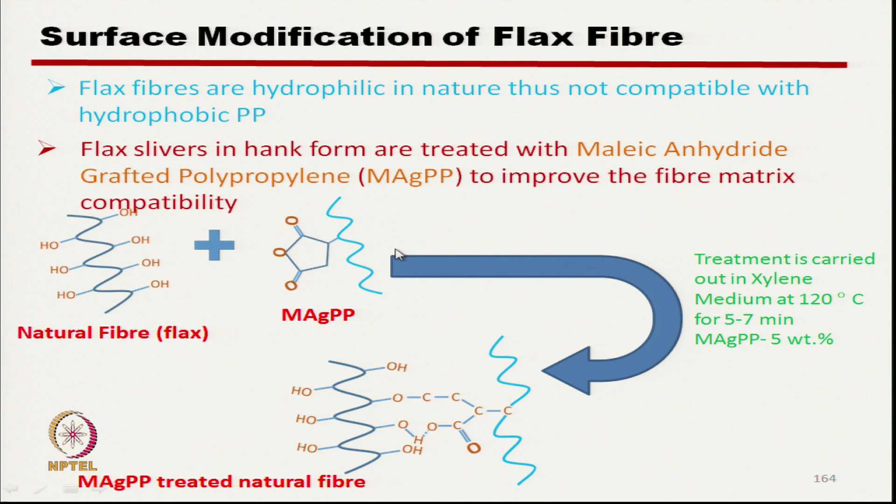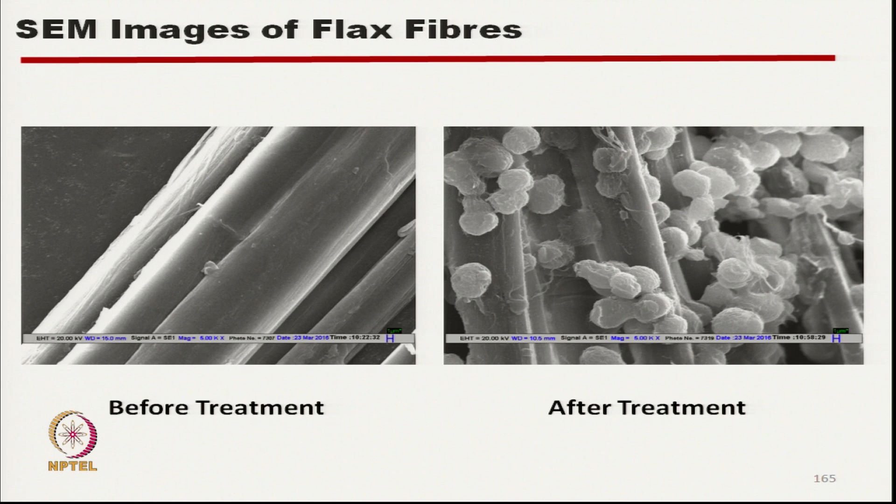With treatment we have seen significant improvement in properties. Here we have used 50-50 polypropylene and flax ratio, and we have fabricated the composite using film stacking technique, and this 50-50 ratio is at the composite stage.

If we see in the thermally bonded roving stage, what we have used is 60-40, 60% flax and 40% polypropylene, and once we add extra polypropylene film in between the series of rovings, the polypropylene percent has increased, so ultimately it has become 50-50.

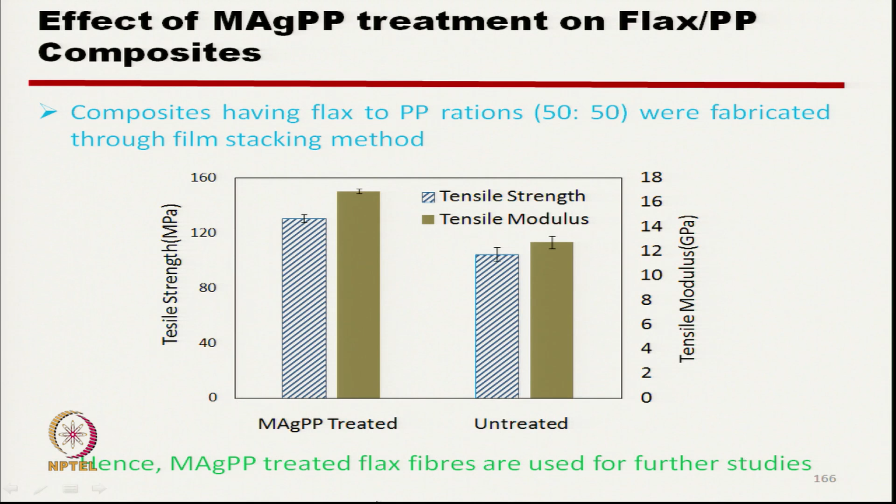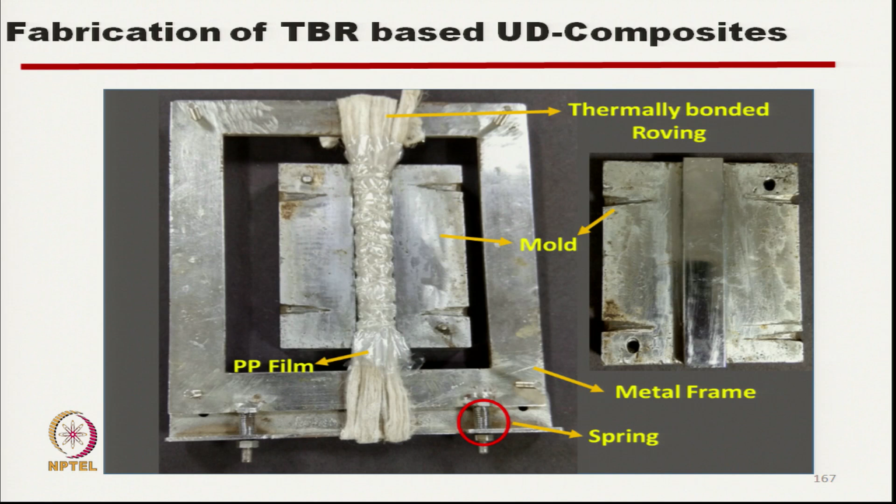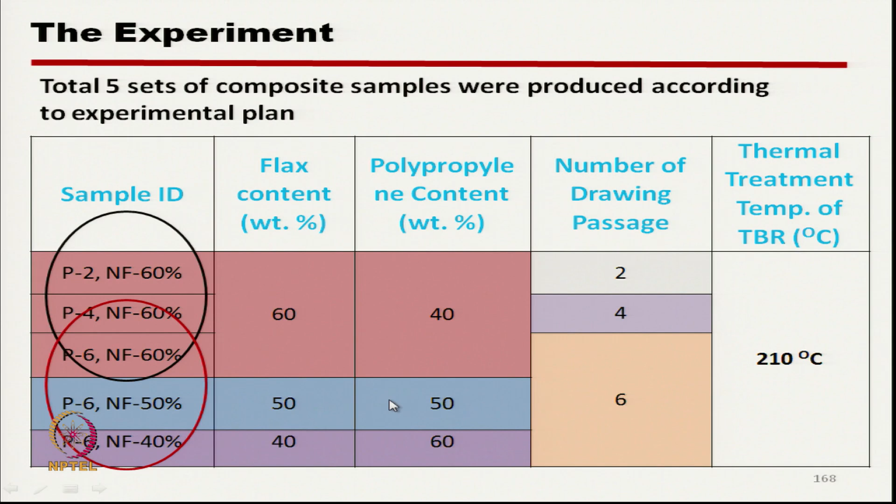So this is polypropylene content and flax content, and at the total composite stage it will ultimately be 50-50. The composite we prepared is up to 50-50, but these are at the TBR stage - thermally bonded roving stage - number of passages, and the treatment temperature for all the composites we have used here is 210. So thermally bonded roving produced at 210 was used in this composite manufacturing process.

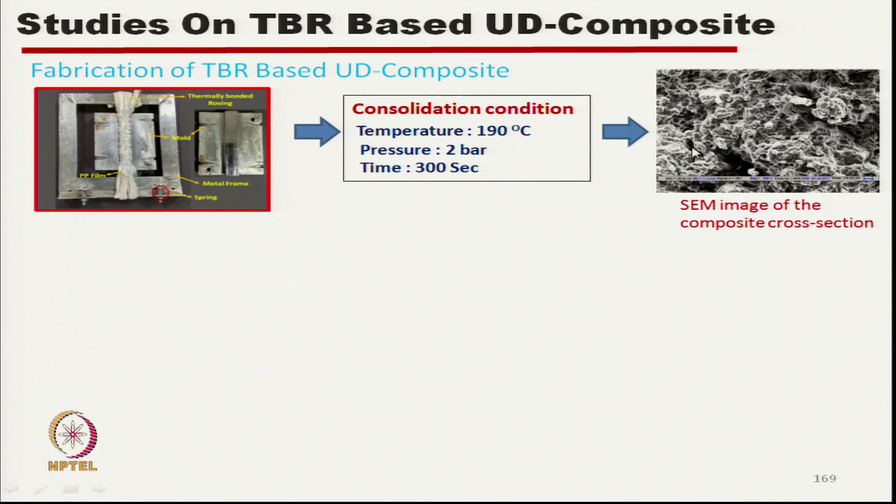After consolidation, if we see this scanning electron microscope image, it is clear that the polypropylene and flax are mixed almost uniformly.

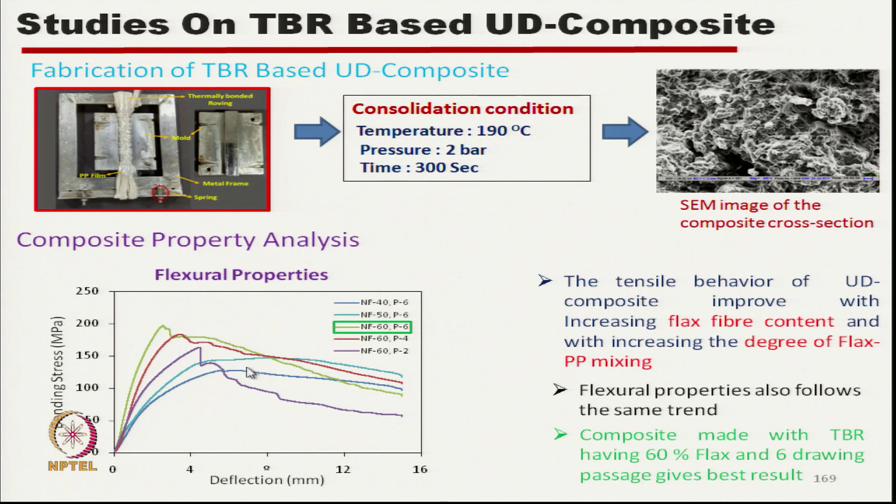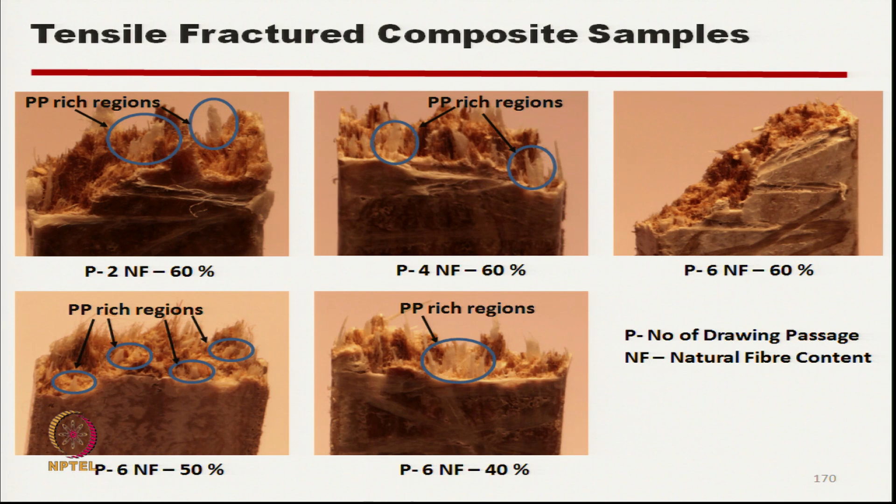Even at 4 drawing passages we can still observe the polypropylene rich zones, but when we increase the passages to 6, these are uniform. So, if we have to produce the thermally bonded roving using natural fiber and thermoplastic matrix fiber, we have to use more drawing passages for better blending.

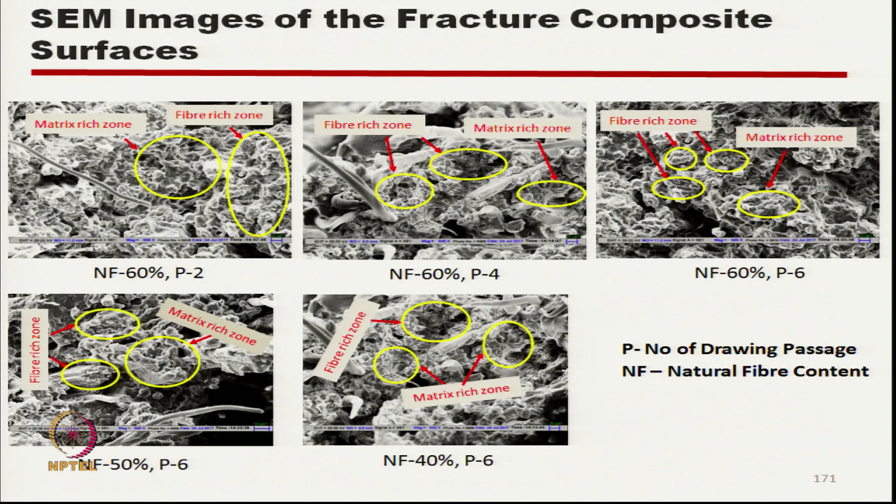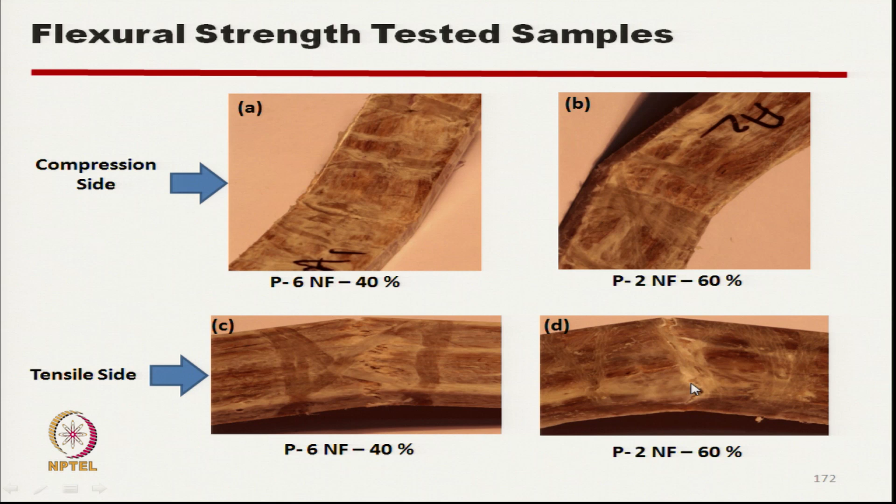In compression side with number of passages of say 6, as the matrix and reinforcing fibers are evenly distributed, there is no delamination or less delamination, but at lower level of mixing we can see they are getting easily delaminated. This trend we have already seen.

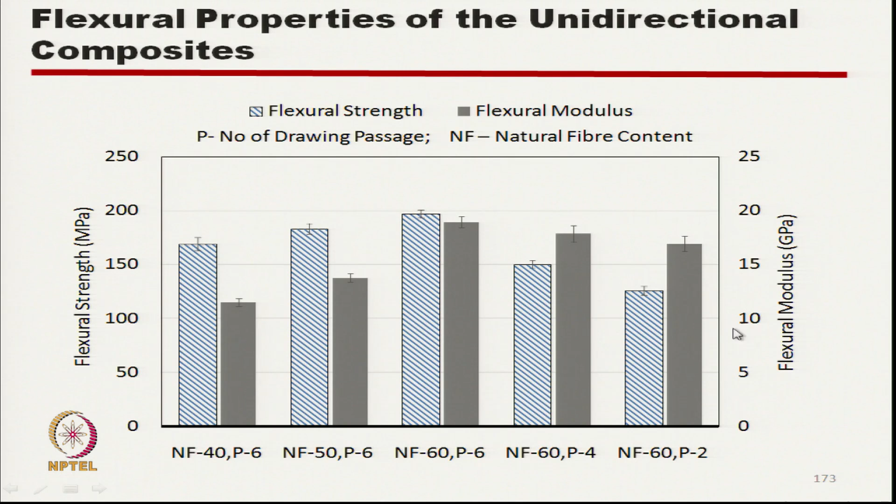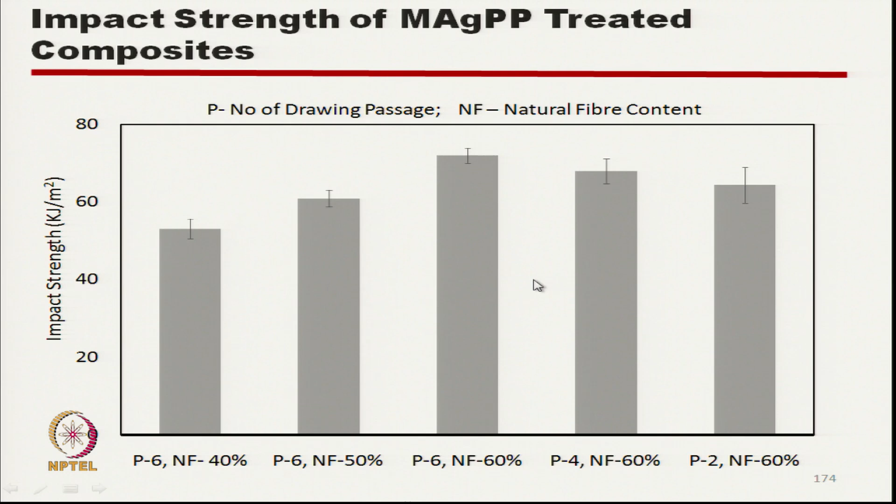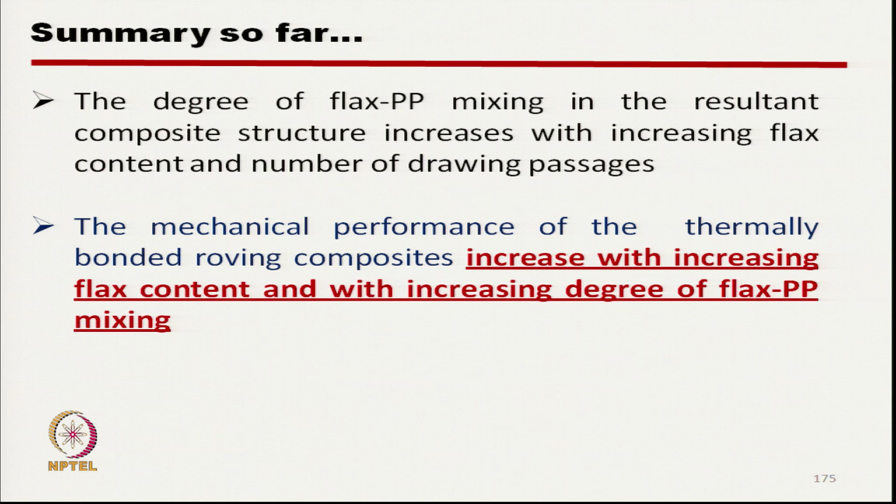Next study was the woven fabric we have developed, the plain woven fabric, and after making the woven fabric we have developed composites by film stacking technique. The composite made by this technique was compared with the unidirectional composite already discussed, and also, for reference, with the glass fiber reinforced composite.

What we have done? We have developed unidirectional fabric and plain fabric. The difference here is that in unidirectional fabric we have used in the warp the polypropylene filament, with very low ends per inch. We can use this thermally bonded roving for warp also.

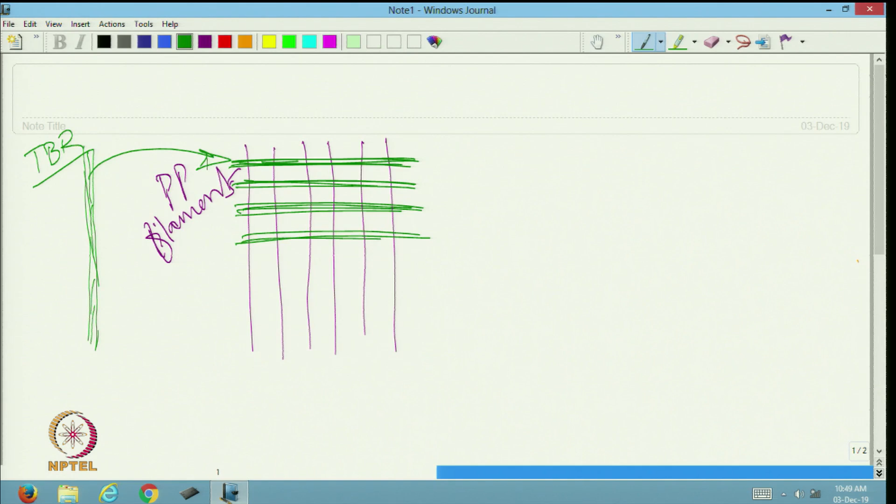Effectively, so this is a fabric, this is the preform, and the warp is PP. So once we produce composite out of this fabric by film stacking technique, this polypropylene will be mixed with the matrix component. Effectively, in this weft direction, the TBR will have the reinforcing fiber aligned to only this direction - that is why we call it unidirectional composite.

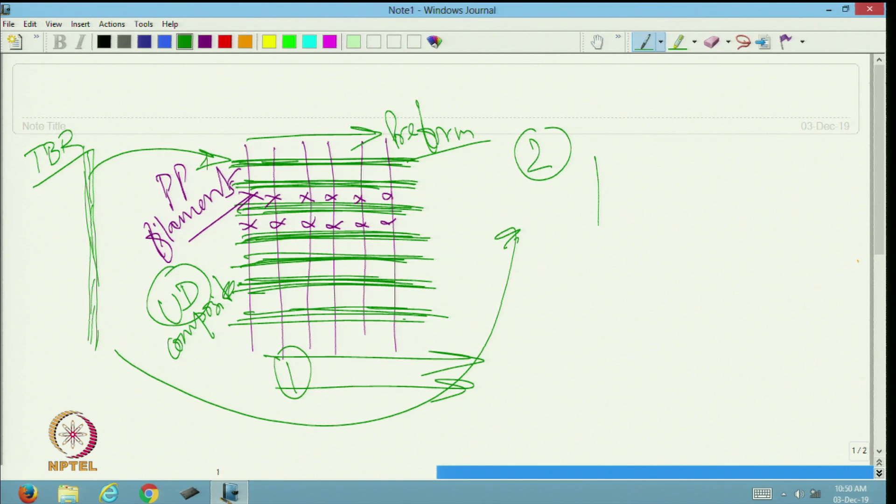This TBR approach is approach 1. In approach 2, what we have done is this TBR was used both for warp and weft. Although in TBR we know thermally bonded roving, here both PP plus flax are present. Now this woven fabric, plain woven fabric, was used to manufacture the composite again by film stacking technique.

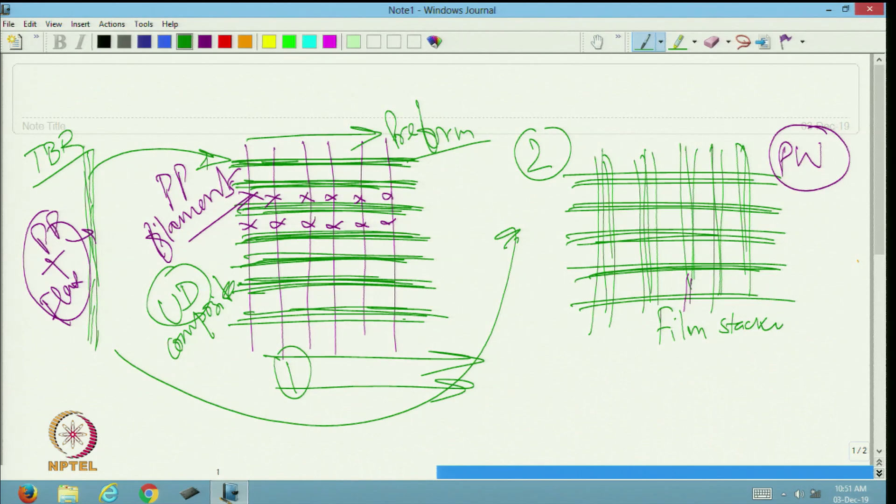So these two different structures were developed - this is unidirectional fabric and this is plain woven fabric. TBR based woven fabrics are consolidated in a compression molding machine, and composite laminates having flax and PP ratio of 50-50 were produced using the PP film. So the final composite had polypropylene and flax proportion of 1:1.

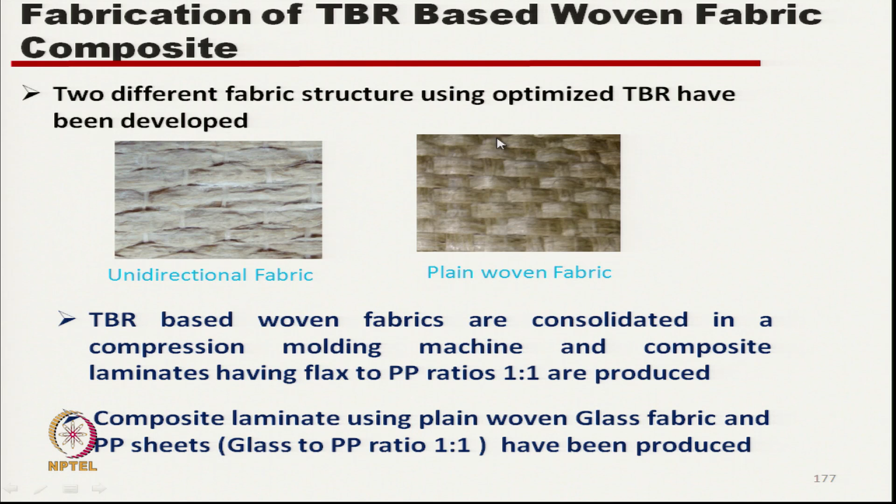Composite laminate using plain woven glass fabric and polypropylene sheet were also produced, keeping the ratio of glass fiber and polypropylene 1:1 again - we used glass fiber as reinforcing, just for comparison. Now you can see here, this is unidirectional rovings arranged in one direction, here rovings are used for both warp and weft. So the thermally bonded roving with 60% flax were used.

Ultimately, in the composite it has become 50-50. Two different types of fabrics were used: unidirectional fabric and plain woven fabric. It is called UD, and this is PW, the woven fabric, once the composite is manufactured by the film stacking technique.

This is the surface. We observed for a few fabrics, in some specific zones, void or improper melting was there due to composite making problems, and we eliminated all those samples. So PP sheets are placed after each fabric layer to reduce void content. We found that if we do not use PP sheet after each layer, void content increases, so we used PP sheet after each layer.

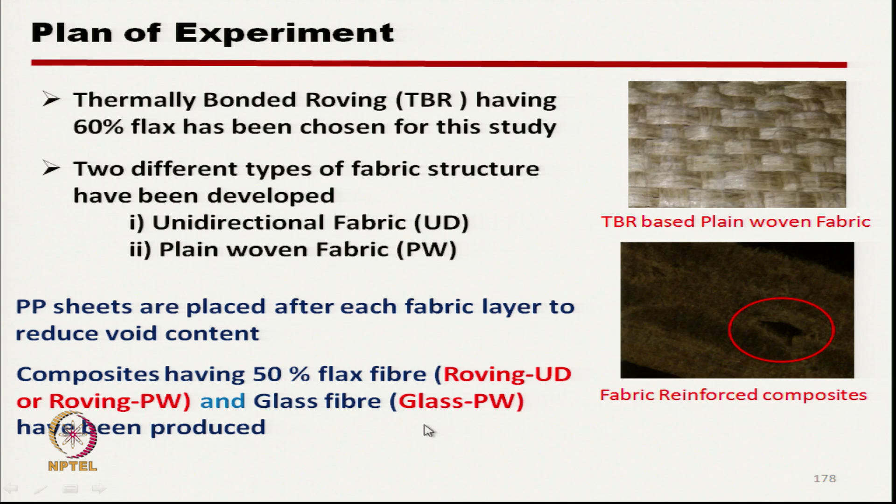So the composite ultimately has 50% flax. So roving UD, or roving plain woven, and also for glass, plain woven fabric composites were produced.

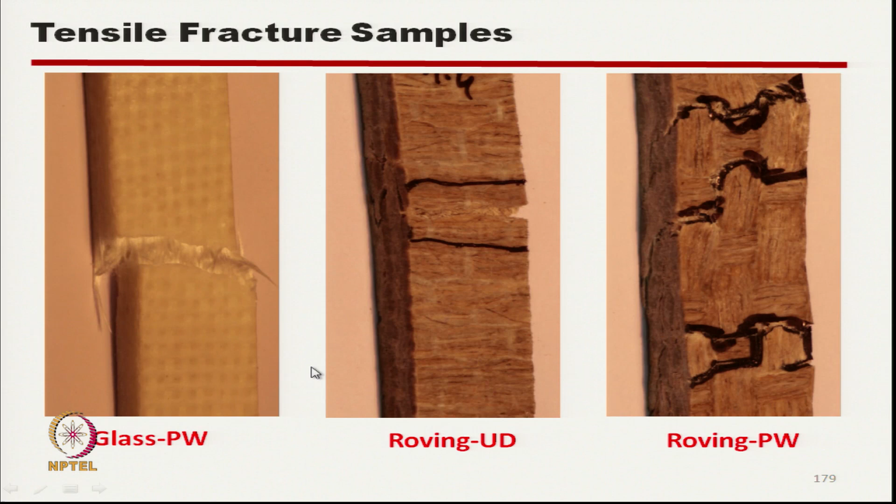This is showing the type of fracture. Roving plain woven composite shows multiple fracture points, and also in unidirectional roving we have seen more than one fracture point. But in case of glass woven composite, the fracture takes place at its weakest point, a single point fracture has been observed.

But if you see the tensile strength of the glass composite, it was much higher than the flax based composite.

This is ultimately strain and stress here. Glass is having much higher values than roving plain woven and roving unidirectional. Unidirectional is showing higher than plain woven fabric for the obvious reason that in unidirectional roving composite the fibers are aligned straight towards the stress direction, whereas in plain woven roving, the rovings are slightly crimped when placed inside the composite, which is why the strain is much higher.

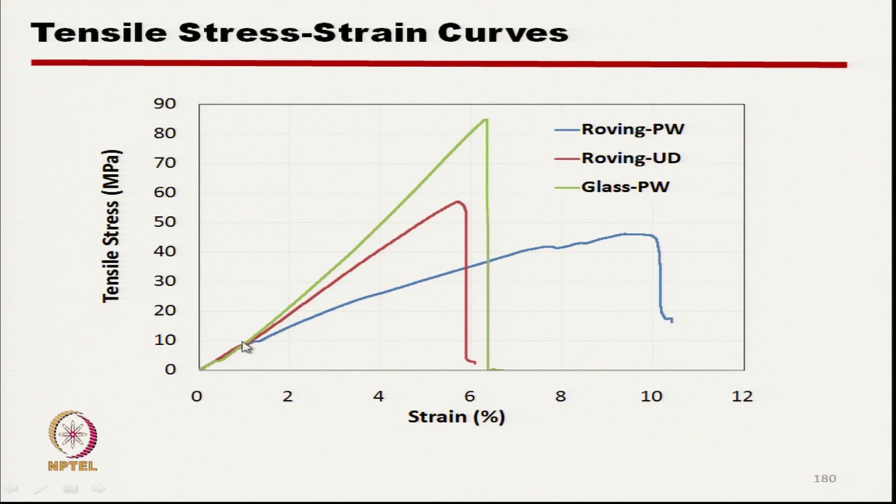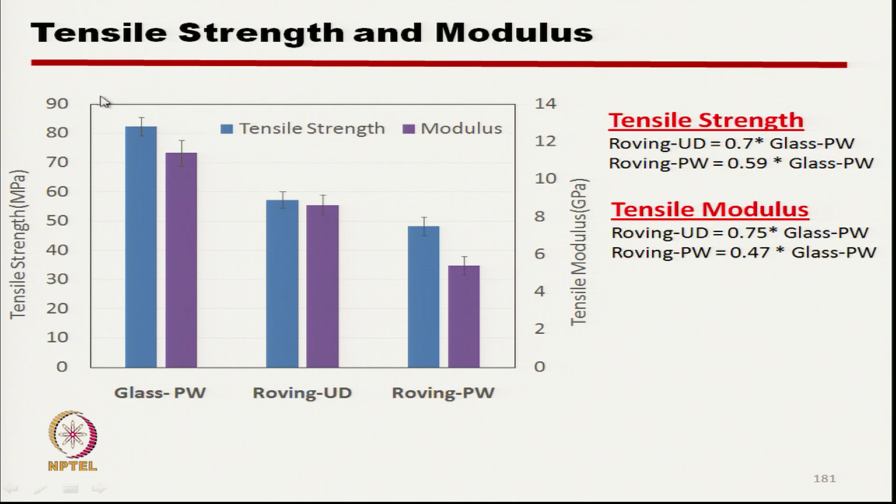Similarly, if we compare the tensile strength and tensile modulus with the glass plain woven fabric, these are much lower, both tensile strength and tensile modulus are lower than the glass plain woven fabric. But once we compare the specific tensile modulus...

This is the modulus, this is tensile strength. Once we compare the specific tensile modulus and specific tensile strength, the unidirectional roving or roving UD is comparable to or better than the glass plain woven fabric. That means, if we take mass into consideration, for unit mass the strength of flax PP composite, particularly unidirectional composite, shows better or equivalent results compared to the glass plain woven composite.

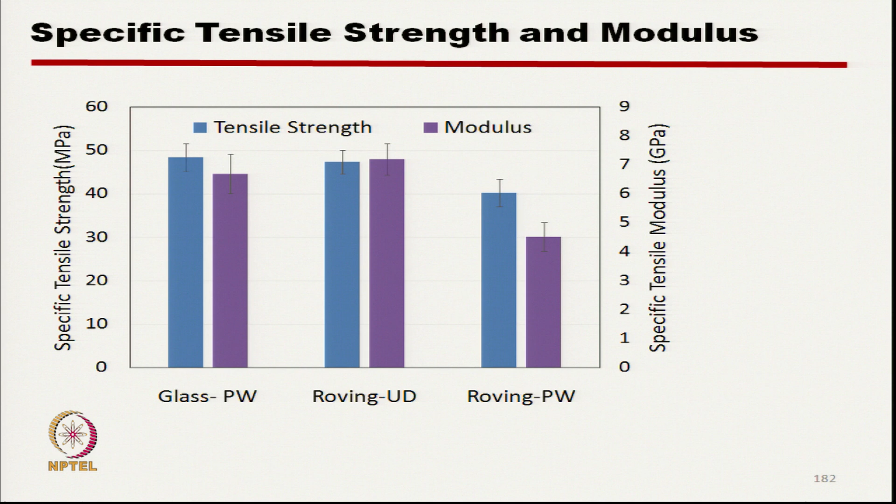But plain woven roving still shows lower modulus and strength, mainly due to the crimp present in the fabric, which gives higher strain and lower strength. Now, this is roving plain woven fabric, where we have already discussed multiple places with damage. This is unidirectional roving, and this is glass PP plain woven.

Interesting: for the glass PP plain woven composite, at the compressional side when we bend during flexural testing, delamination takes place, but this delamination is absent in case of flax polypropylene composite, which is a very good sign as far as flexural characteristics are concerned.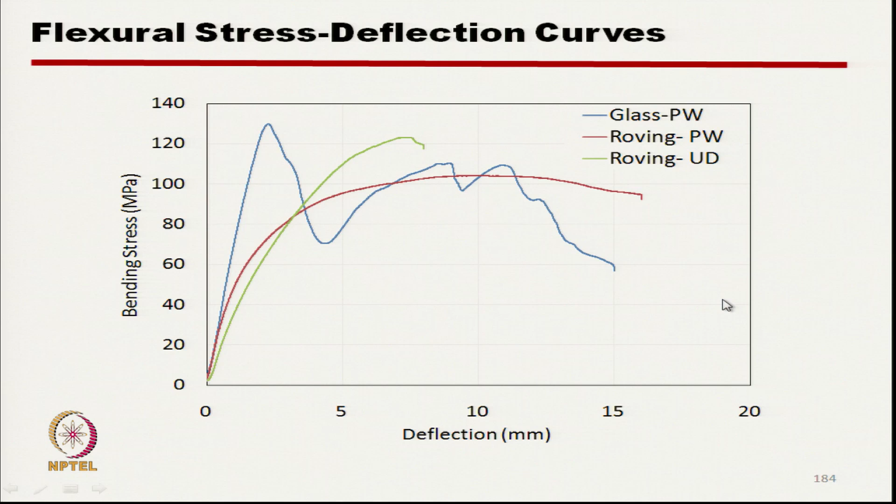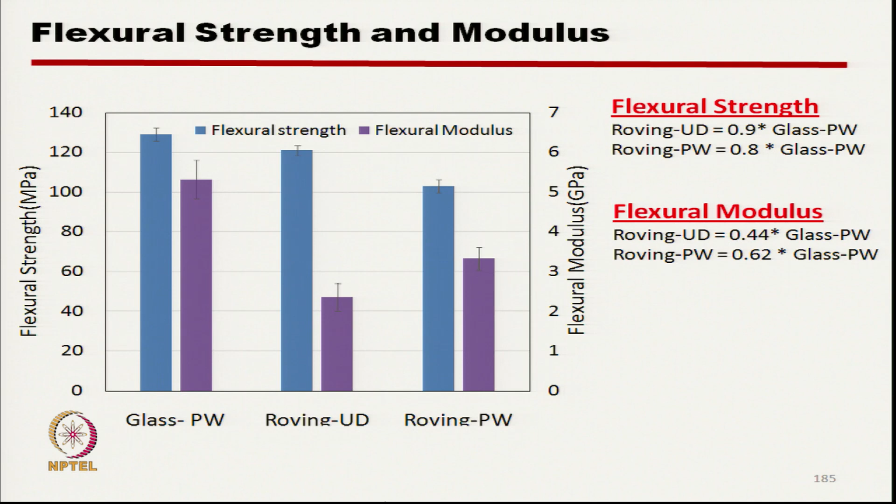The flax polypropylene roving based composite, although its ultimate bending strength is lower than glass, still maintains a certain stress level. So the flexural strength of roving plain woven roving is lower than glass, but as we have already seen, the specific stress is comparable to glass.

As far as impact strength is concerned, we used the drop weight impact tester, and here we have to use a plate-like specimen. This is the impactor.

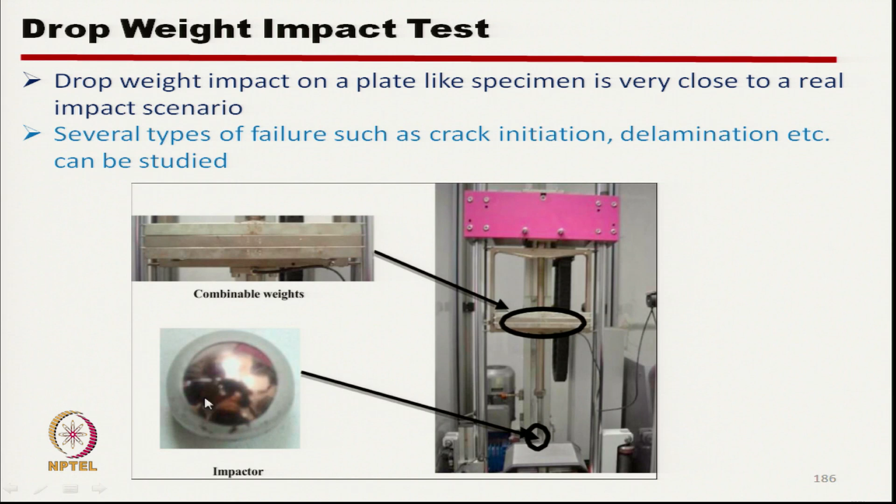Here if we see the glass plain woven fabric, there is crack formation. This crack formation is mainly due to delamination, and the diameter of the hole created is much lower than in the plain woven roving or unidirectional roving composite.

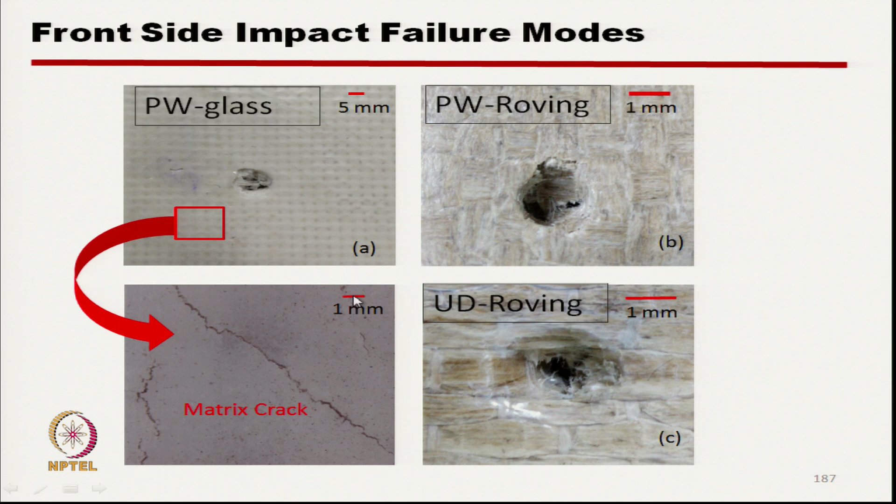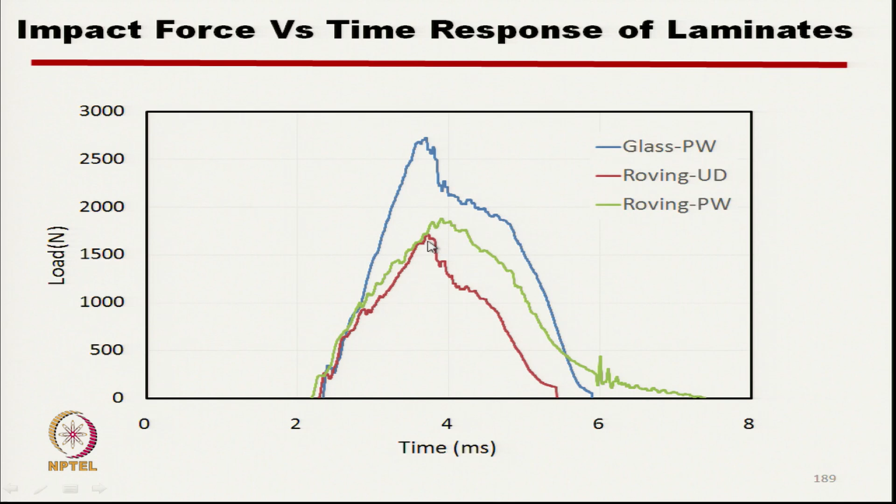Impact load versus time response: the impact load is higher here, followed by plain woven roving, and unidirectional roving is actually behaving in an inferior manner as we have seen in the earlier picture, giving a higher damage area.